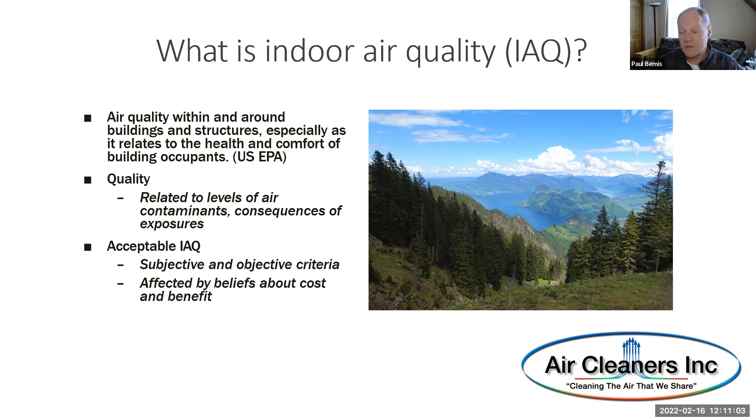So what are contaminants and sources? Well, there are a number of them. There's things like CO2 and refrigerants that displace oxygen, there's toxic gases. What we're going to be talking about today, however, is really in this category: it's allergens and pathogens.

It's the really small stuff that bothers us in terms of our human health. COVID is, of course, a pathogen. It's not the only one, but there are many in this category. Allergens that bother us are also triggers for asthma. So it's really these and this group that we're going to be talking about today.

Sources of these, outdoors, include general air pollution, the California fires for example, or pollution in the streets. You noticed yesterday in the news that the Biden administration is going to increase the requirements, the standards, giving back California control over particulate in the air from diesel engines. Automobiles in general are a great polluter, producing very small particles.

Indoors, we have building materials, furnishings, mold spores, which are very small. We have combustion from cooking, from cleaning, from heating, and we have occupants. The occupants are producing particulate as well, and we'll get into that a little bit more in terms of pathogen transmission.

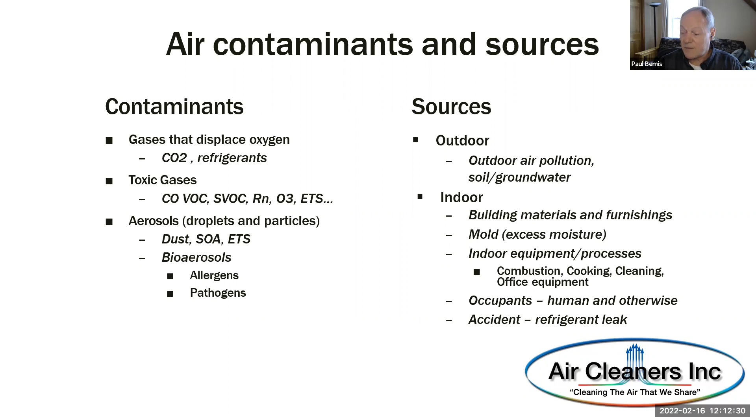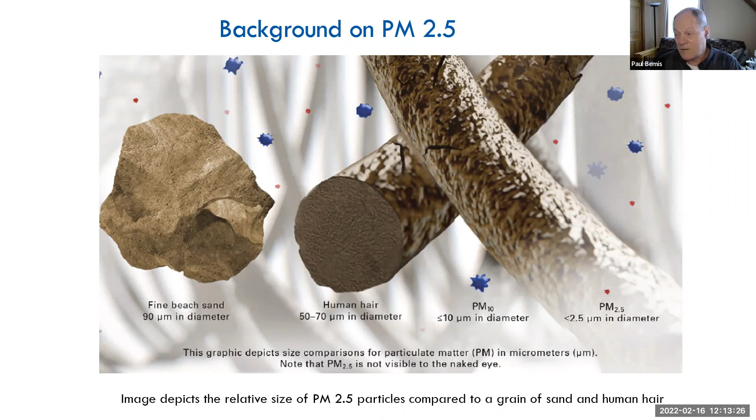So the ones we're worried about are up here, these little red ones. In fact, it's about the size of my cursor. This gives you a relative comparison of the size of the particle we're most concerned about compared to a human hair. And the ones that are really small are the most dangerous because they go deepest into our lungs and affect our physiology most dramatically. They're a straight shot to the bloodstream, and that is not a good thing for us as humans.

Now, the WHO has been focused on this, and PM 2.5 came from outdoor air pollution particulate measurement, but is being used as well for all particulate. It's the little stuff you're worried about, and they've just reduced this number to a smaller one. We're down now at 15 micrograms per cubic meter. This is a density, the acceptable level of small particulate in the environment that's going to be the new standard. So they're tightening these things up.

They go up, PM10 is a little bigger, that's a 10 micron particle. We do better with those because first of all, they fall to the ground a little more effectively due to gravity. Second, our systems catch them easier, most notably our trachea and the fibers inside of our throat, and also our lungs, catch them a little easier than the 2.5. The 2.5 particles are the ones that cause us the most trouble, and they are also, by the way, the ones that are transmitting COVID.

The effects of indoor exposure are pretty obvious. For us, the ones we're concerned about today are allergy, asthma, infection, transmission of a pathogen such as COVID or the common cold. And there's also a comfort component here as well. Perceived air quality is something that people can experience being in an indoor environment. We've all heard about sick building syndrome symptoms, which are an indoor air quality issue.

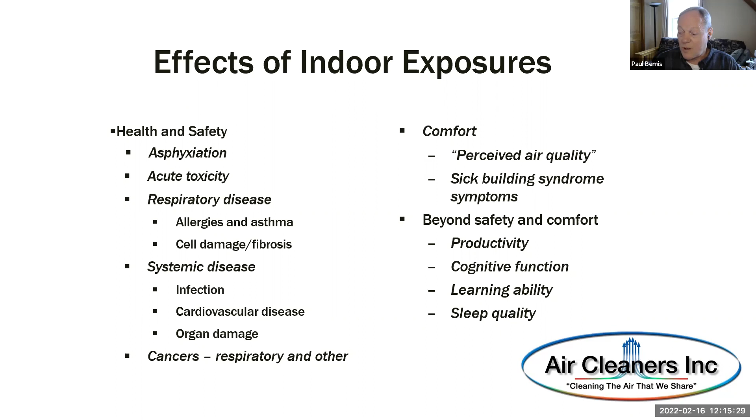Now, what's happened, of course, is COVID has focused our attention on this like never before, because the dominant transmission medium for COVID-19 is airborne, and it is very small particles, 2.5 and below, and they float in the air on thermal currents. But it has been a vehicle, a lever, to raise more general questions about what is acceptable in terms of indoor air quality.

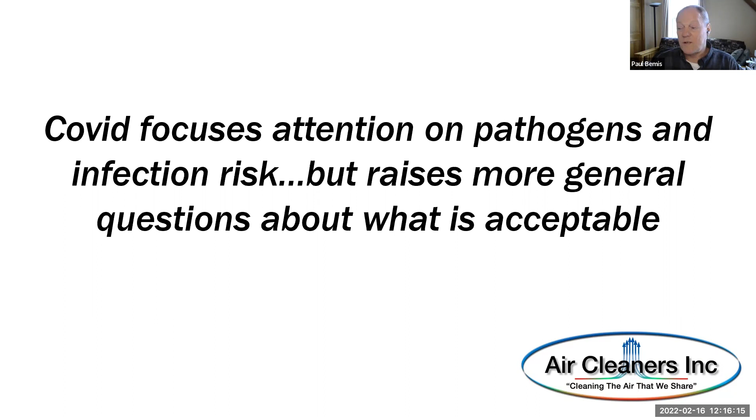So it's good for us all, whether those of you in the audience are suffering from things like asthma triggers or serious allergies. This has been good for you in general because it's raised the awareness of the need for better indoor air quality. And quite frankly, it's been ignored. We've known it for quite some time, but it has been ignored.

Now, there is an organization that I am affiliated with, ASHRAE. ASHRAE is a standards body, an organization with about 30,000 members worldwide, who focuses on what we call the built environment: buildings, homes, anything humans live in. The acronym stands for the American Society of Heating, Refrigeration, Air Conditioning Engineers. It's an old acronym, been around since the early 1900s when we first invented refrigeration. And they've continued to work on acceptable indoor air quality.

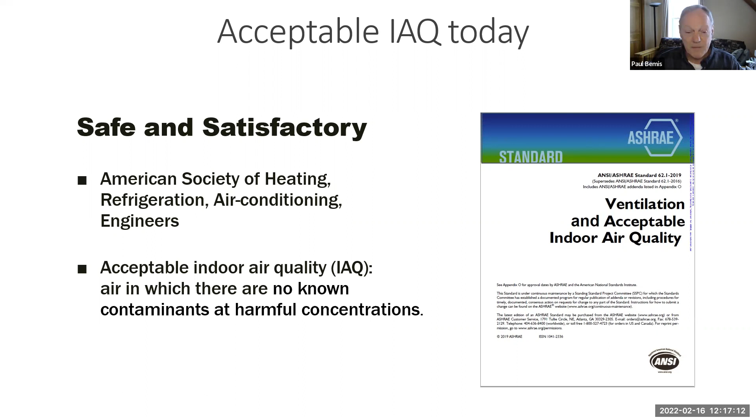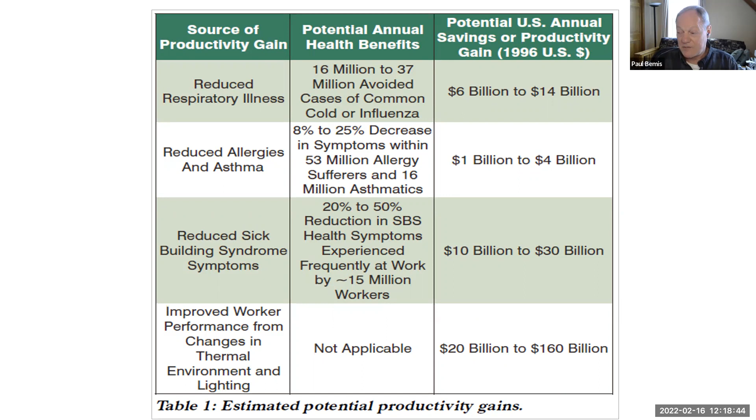Those are the cost savings, but the productivity gains are getting a lot of attention right now, because if you're an organization that relies on productivity improvements, the opportunity to do much better with clean indoor air outweighs many factors in building cost, including the cost of energy to drive it itself. So it's a big one.

No question about it. We just reviewed a study by Lawrence Berkeley Labs focused on California schools. They measured a bunch of California elementary schools and found a direct correlation between good outdoor air and productivity improvements. They tested it, and they're not the only ones—Harvard has done these studies as well.

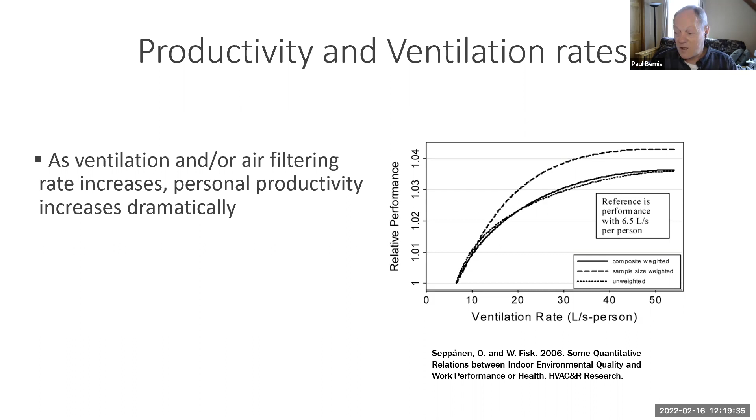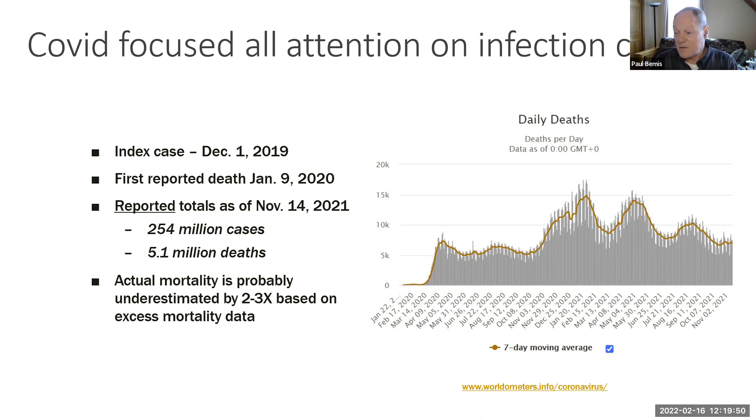It's well established. Now, the attention most recently, of course due to COVID, has been focused on infection control. That's in the same area—it's still indoor air, and we are looking at infection. It has taken a while for people to understand how COVID-19 was transmitted.

Some of the things we've learned from the pandemic is that airborne transmission of these infections occurs. That was debated early on by both the WHO and CDC, but it occurs and it is dominant. The dominant transmission for COVID-19, as well as probably all the others, including the common flu and common cold, is airborne.

This dispels some long-held ideas about how these diseases or viruses are transmitted. You remember early on, it was all about touch—clean everything, wipe it down, don't touch. What about our groceries coming home? There was all kinds of sensitivity around touch, direct or indirect—touching someone or something directly or indirectly.

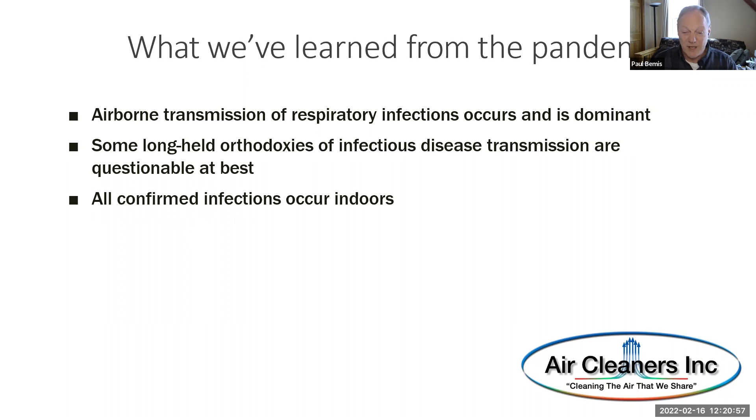But all confirmed cases have occurred indoors. There have been no outdoor cases at all, which argues that it's not just touch, because we're touching outside as well. And HVAC systems play an important role in this indoor airborne risk mitigation factor.

But I want to point out, having been in the business for over 20 years, HVAC systems in general—which stands for heating, ventilation, air conditioning, mostly related to forced air systems which many of us have in our homes and buildings—were not designed for pathogen mitigation.

They were designed for thermal control. That's really it. We've been controlling the thermal environment so it's the right temperature, and along with that, the right humidity. We do that well. What we don't do well is mitigate the transmission of pathogens, because it's never been a criteria. The whole HVAC industry was never positioned to be focused on pathogen mitigation until COVID-19 came along.

Now, it can play an important role, as this slide points out, but in many cases it's simply not set up to do it well. Existing buildings, therefore, don't provide a lot of protection, particularly if you don't own them.

If you're renting or leasing a space in a building, you don't have control over the HVAC system. You don't know what's going on, it is what it is. So they don't generally provide a lot of protection, and they've historically not been focused on this. The knowledge about the importance of this came late in the sequence—the CDC and WHO didn't really recognize it until we got well into 2022, late 2021, early 2022. They stood up and said, yes, it is airborne.

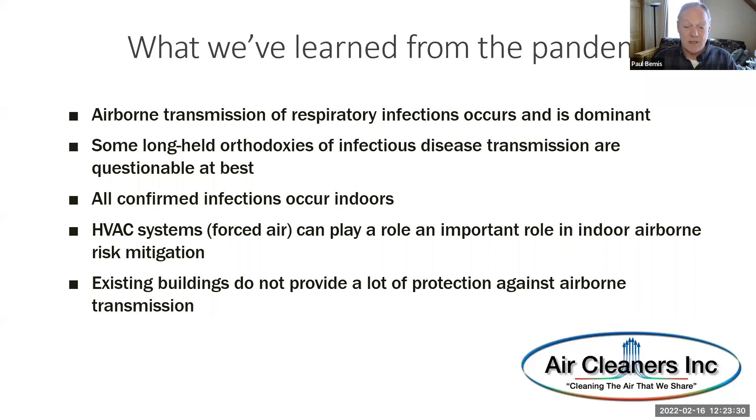Exactly, that is exactly correct, Chris, because they hang around the same size. What we're talking about is an airborne particle, a small particle. That particle can carry COVID-19, the common cold, the common flu, it can carry many things. But it's also, just by itself, a dominant trigger for asthma and allergies. So by reducing the particle count, by getting the PM 2.5 count down in an indoor environment, we satisfy multiple criteria: we reduce the potential for transmission, and we reduce the triggers for allergies and asthma at the same time. So the answer is yes.

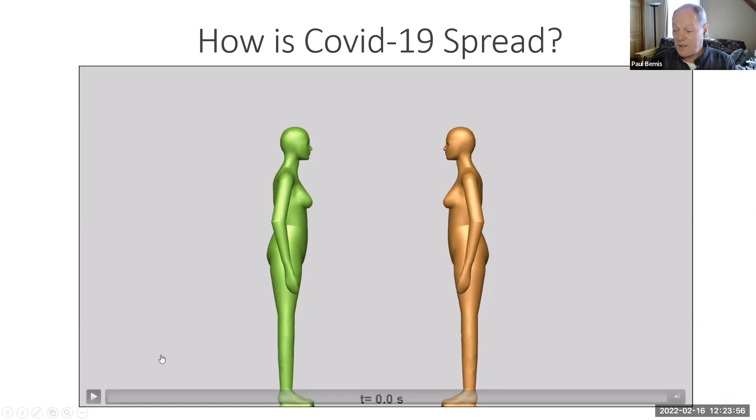Now I'm going to be showing you a lot of what we call CFD animations, CFD models. We're modelers here, we do a lot of CFD, and it stands for computational fluid dynamics. We're going to model airflow here, and we're able to do this using computer simulation. It has been validated in the aerospace and automotive industry for well over 30 years, and I am an expert in CFD modeling.

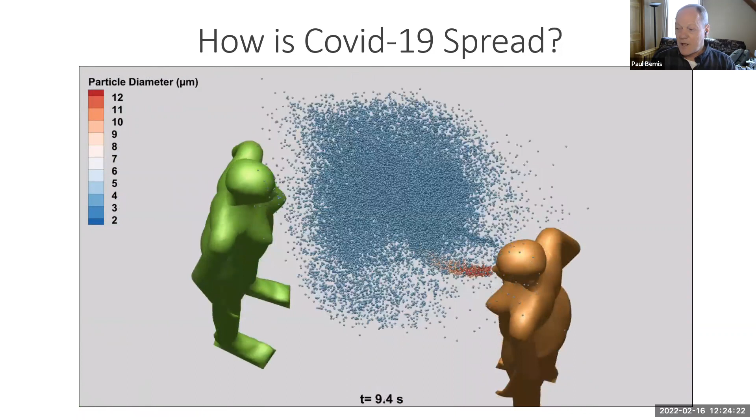So here we're going to show you a model of particles coming out of someone's mouth. This has been validated in the laboratory, that this is what occurs. What the CFD software allows you to do is visualize it. So we're visualizing someone talking while they're standing there speaking, and you can see that cloud of particles coming out of their mouth. You'll also notice they start floating up. This is quite typical—our bodies operate at around 98.6 Fahrenheit, and when we speak, particles come out of our mouth and float up, and they will eventually fill the room.

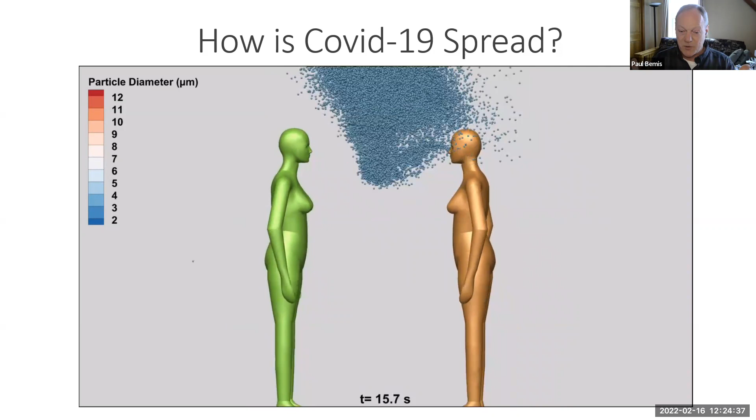You can think of it as a smoker. If any of you are old enough to remember the old smoking days, people would light up a cigarette inside a building or a room, and the smoke would rise and finally accumulate in the ceiling and work its way down until the entire room was gray. Same effect here, except it's a deadly pathogen instead of just a cigarette.

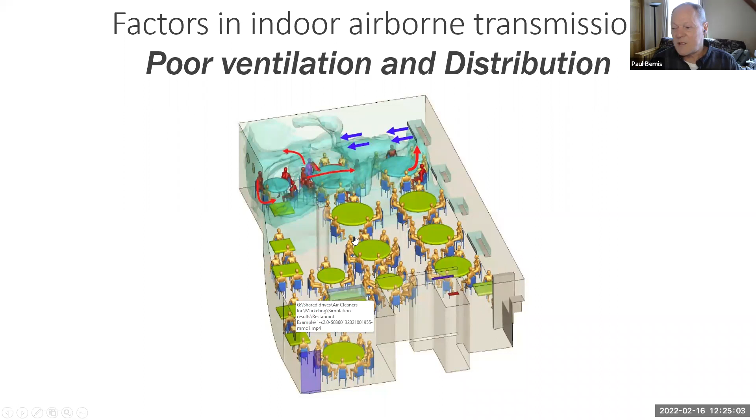Now, what happens in a room—I'm going to show you some more animation here. This is actually a case that was well documented. This is one of the first super spreader events that occurred, and it occurred in Guangzhou, China. I'm going to show you the animation sequence from here. I am going to stop it and show you what's going on first.

So here we have, sitting over on the left-hand side of this restaurant, the emitter—we call this the index case. This is the person who has COVID-19 and they're breathing. And again, you see that going up into the top of the room and bouncing and beginning to be mixed. Red is bad—red is the highest concentration of the pathogen coming out of their mouth. Over here on the right-hand side, we have the air conditioning units. These are recirculatory in nature, they don't do much filtering.

This is very, very common that you have what we call a fan coil—it's just a cooling coil with a fan blowing air by it, and it circulates, very much like an air conditioner you have in your home or in many buildings where they don't bring in outside air, they're just conditioning it. Remember, I told you earlier it was a thermal issue, so if you can get the temperature right, everybody should be happy. Not quite so much, because this pathogen and this airflow from this device tends to spread it. Now, these people in red here did get COVID-19—there was a number of them here who contracted the disease after being at this restaurant.

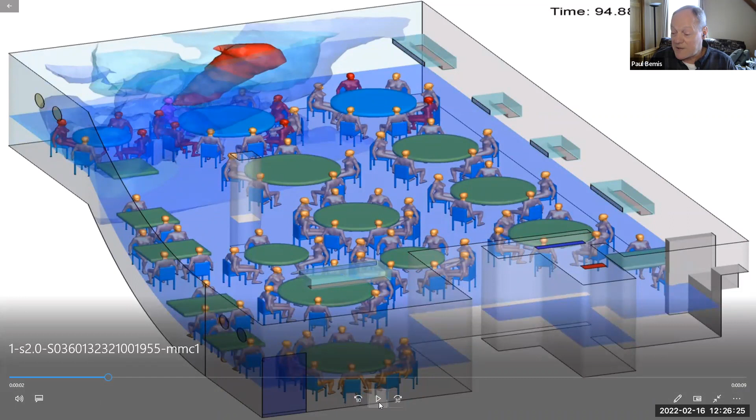Where people over here did not get sick, and if you watch this sequence, you can see why. The people who did this work went into the restaurant and modeled it and came up with this output.

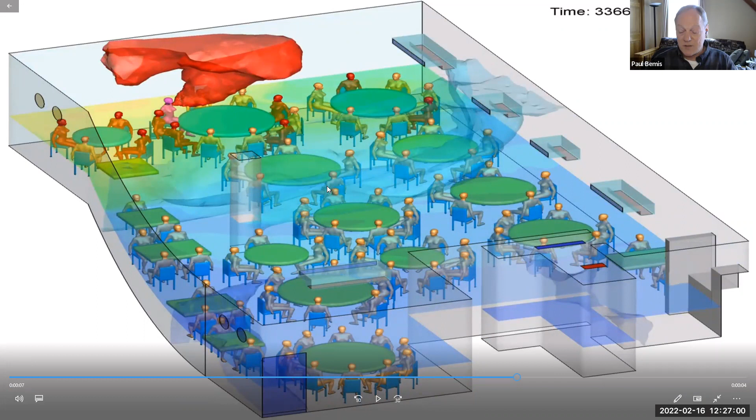You notice over here, remember, red's bad. So it's getting mixed into this environment and creating an entire area on this side where the pathogen has a high enough concentration, because it's a density issue, to make these people ill. These are the ones who caught it. It was the first time we had the opportunity to actually go in and scientifically measure and document what was going on, and then correlate the simulation to the people who became infected. So, very important piece of work done there.

And you can use, of course, CFD to visualize it. CFD gives you the opportunity to see it. And that's why it's significant.

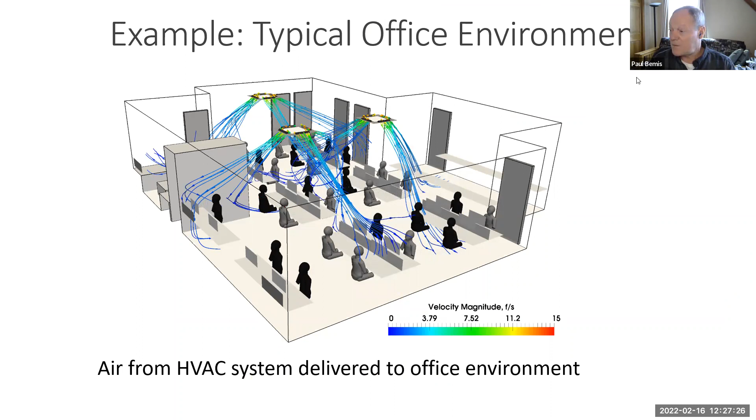Now we have another one here. This is a typical office environment, and I'm going to show you this in what we call a 3D visualization. It's a static image, but I get to manipulate it and rotate it. What you'll see here is, again, these are cooling units at the top. You see them up in the ceiling.

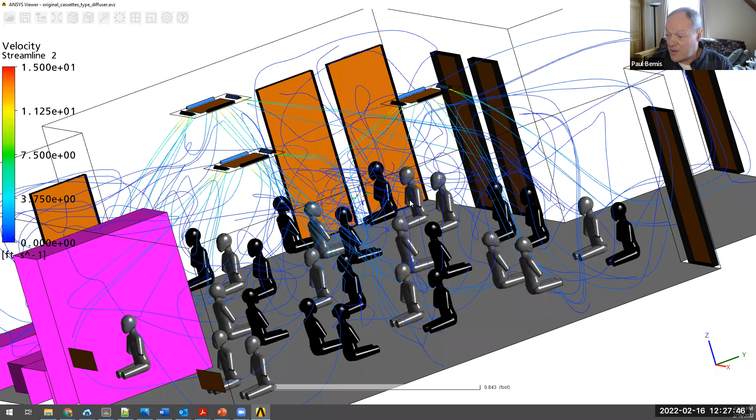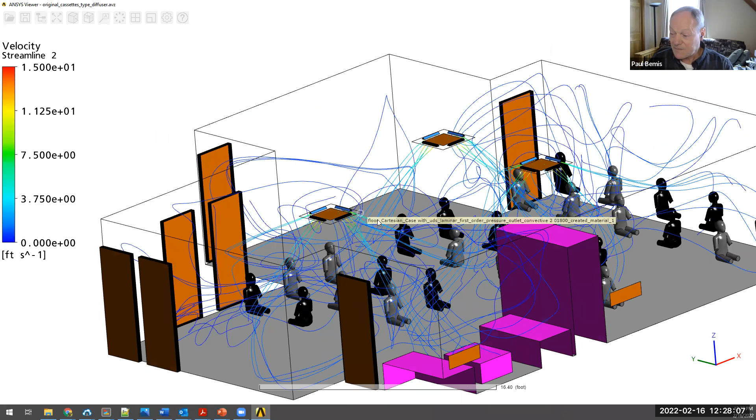Many of you in your environments, particularly work environments, will look up and see these devices in the ceiling that are returning and supplying air. But you notice it's not uniform. The air is moved around the room by the location of the vent and its flow rate, the speed at which the air is coming out, and there's not a lot of uniformity there. These typically get placed just anywhere. There's not a lot of rhyme or reason to placement of these devices historically. They're just put in the ceiling, often based on lowest cost. The HVAC person will put them in wherever it's the lowest cost.

What this causes is a non-uniformity of air in the room, both thermal, but more importantly, particulate. What you'll see in a room like this is a very uneven sequence. Here's a still of it here. You can see those air jets coming out, and it causes it to be uneven.

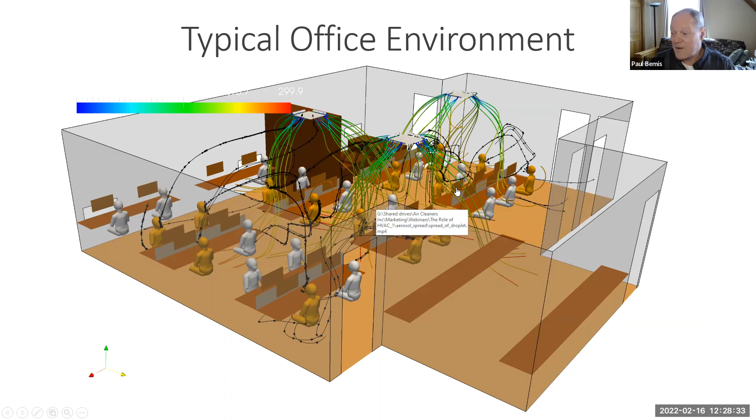The result is, if we looked at the air distribution in the room as a function of color, which I'm doing here, if it's red, it means there is very high concentration of particulate, and if it's blue, it means there is low concentration. You should see a uniform color here. If the room was evenly distributed with air, everything in there would be the same color.

But you see there's these pockets. Now, these pockets are the same ones that we all have in our homes where all the dust collects. Most of us know in our homes or wherever we live where the dust accumulates - this is the place it accumulates. It's called a low pressure area. It's where all the particulate loads up.

Now, that's a bad thing if there's COVID in the atmosphere, because if you're over in this area and you're breathing, that means the density, concentration of the pathogen will be highest in that region. And as we move up in the room, you see I'm walking up, just slicing the room in a vertical direction. As you see, you move up, it gets worse, because, of course, the pathogens all float near the ceiling.

So one of the problems in buildings, just to summarize here, is that the air is not distributed evenly throughout the room. It just happens to be the nature of the way they're designed. This will be rethought - I think COVID's going to make us all rethink how it's done, but this is how it is today.

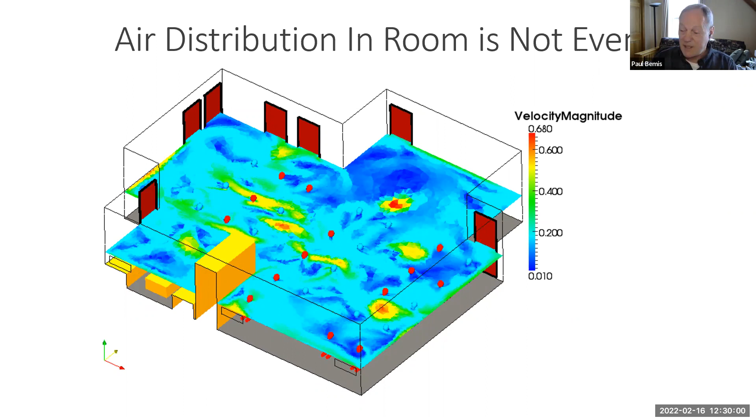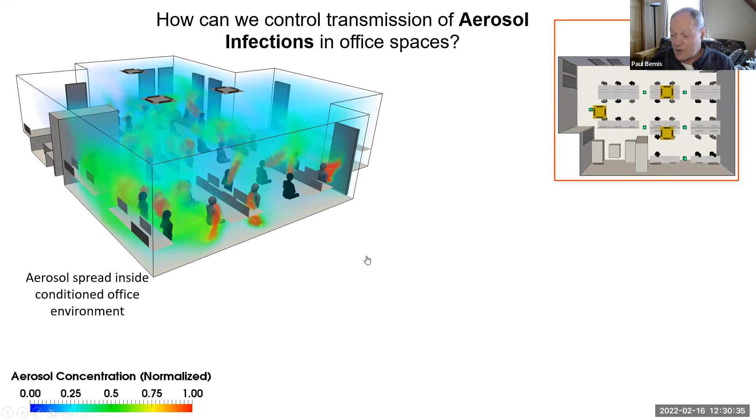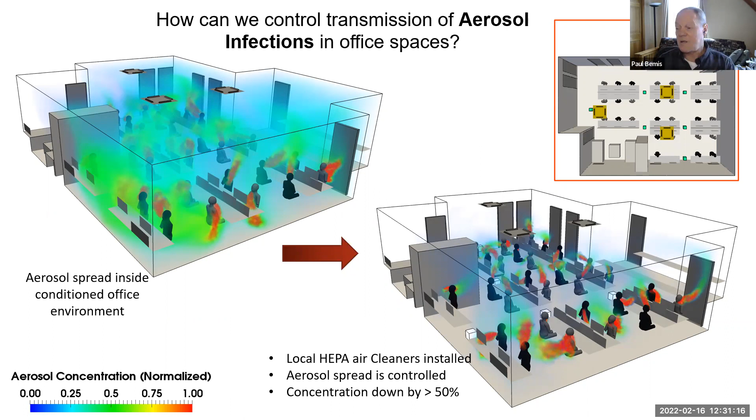Early on, we began to look at the effect of putting air cleaners in, particularly HEPA air cleaners. We knew this was going to occur because we're experts in HVAC and interior cooling and heating. We knew this would occur; we were wondering how to fix it. So early on, by putting some air cleaners in - you see them sitting on the floor here - we put 6 into this room and we were able to drop the average concentration by over 50% by putting those air cleaners in, even with all of these people sick. So we began to think, okay, air cleaners look like they're going to be both necessary and important, because in order to have control over your local environment, you need to do something, be able to bring something in. Portable HEPA-based air cleaners, we thought, made good sense.

Now, the assumption here is that the outdoor air is clean. In California, when they're having wildfires, it's not clean. If you're living next to a busy street with diesel engines going up and down—this was in the paper today about Long Beach and the particulate in LA—if you're living anywhere near those tractor trailer trucks, outdoor ventilation is not the answer. Indoor ventilation is, or indoor cleaning through HEPA filtration. So they are additive. You can have one or the other or both.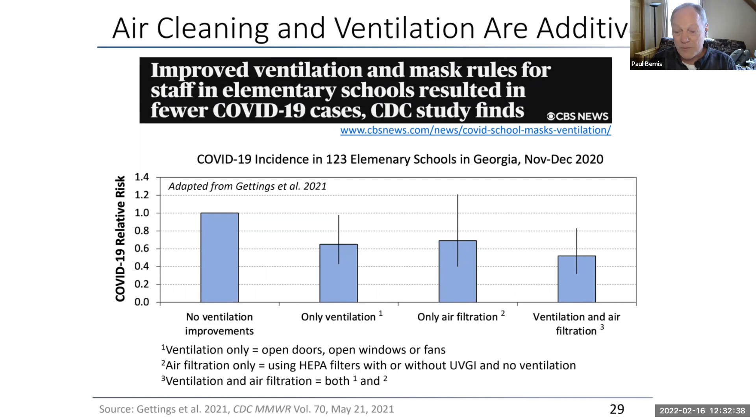Now that turns to air cleaners. I just want to mention that air cleaners are an effective way to improve the environment. We got involved with the development of air cleaners as a result of all this modeling we were doing, and they are effective, particularly if they're well made. You have to be careful because some people make claims that aren't good. What you want is a HEPA-based air filtration unit. That's important, to have that word HEPA in there, and that it should be a device that works well.

Ultraviolet radiation also works, but has to be implemented correctly. The way ultraviolet works is that it's actually a radiation, irradiating the pathogen itself and killing it. However, it needs something called dwell time—it needs to be exposed to the pathogen long enough to kill it. So if the pathogen goes by it too fast, it doesn't have an effect. Implementation of UV is specific to the environment and has to be done well. We do know how to do it well. It's been around since the days of influenza, so we know it's effective. The question just becomes how to implement it correctly.

Paul, quick question for you on that, or actually two questions. One, does the ultraviolet do anything for particulates? Does it remove particulates that are not pathogens, for example, allergens like mold or other small particulates?

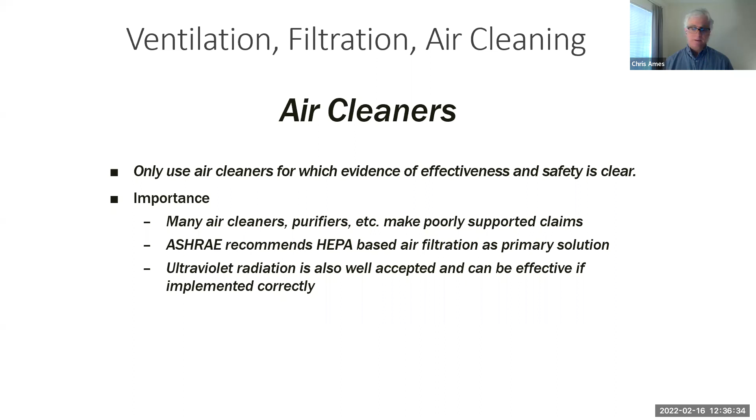So it's not just us making claims here. This is the EPA. These people don't say this easily or lightly. It's only after a tremendous amount of study that they would say something like this. So it is effective, it does work. We have both the EPA as well as anecdotal studies that show it.

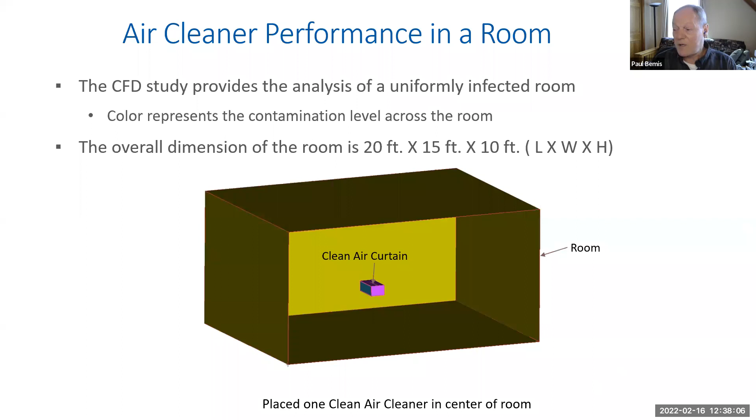So here's how one of these things might work. This is an air cleaner, a generic air cleaner. It happens to be one we built, but in general this is how they work. We put it in a room. We're modelers, so we can simulate this. We put it in a 20-foot by 15-foot room, by 10 feet tall, and see how it works.

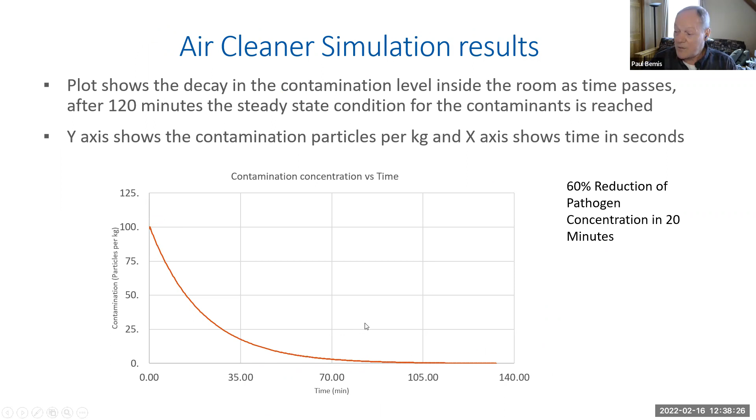What we find is that within a very short period of time, when we plotted it, you can see that the particulate drops like a rock as a function of time. Within 20 minutes, 60% of the particulate in that room is gone. 80% in 30 minutes - boom, comes down very quickly - and less than 1% towards the end of it. I do have an animation sequence of this as well.

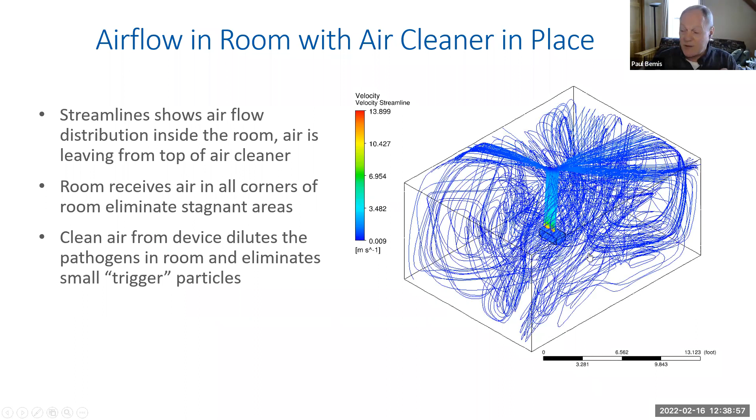I'll show you how this particular device works. It shoots air out the top and just purges the room, so it flows up and around and circulates very quickly, driving down overall concentration by mixing. You want the room to be really mixed. So back to my earlier slide where you saw the multicolors - you won't see that here, because it's going to uniformly drive everything down.

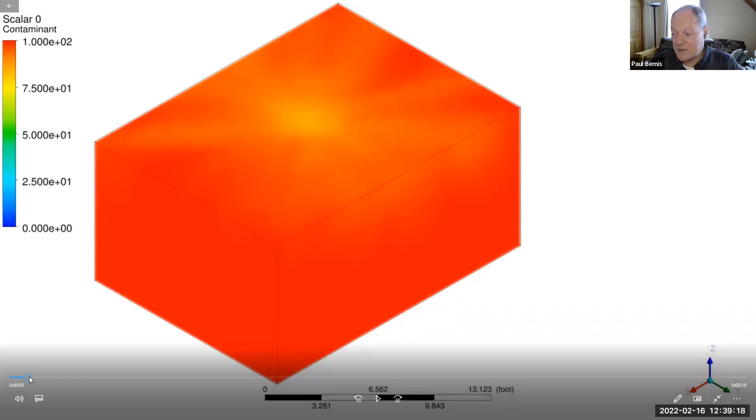Let me just set this animation up before I run it. What we're doing here is starting with the room in a state that is fully filled with a pathogen, or in this case a particulate - a 2.5 particulate, it's just not good. We have an even concentration of it throughout the entire room. As we run the simulation, you'll watch that go from red to blue very quickly.

This simulation runs for about an hour - that's an hour's elapsed time. And you see the room just dropping to be absolutely clean. This is how they work. They're quite effective.

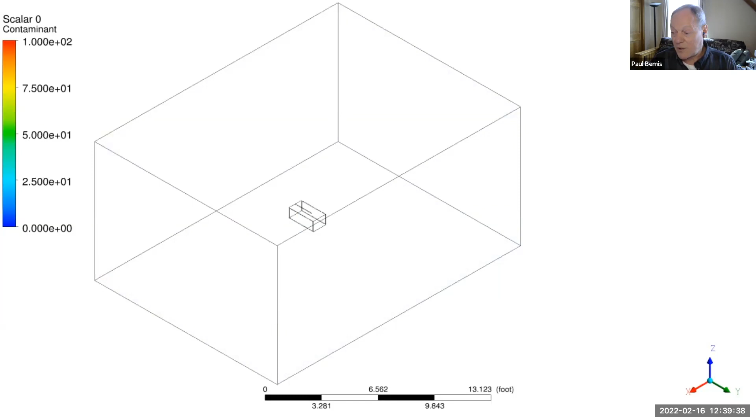It reduces the impact of seasonal effects like allergies, endemic diseases, and it will improve overall health, improve the economic output, and it is synergistic with other moves that we're making in the wellness space.

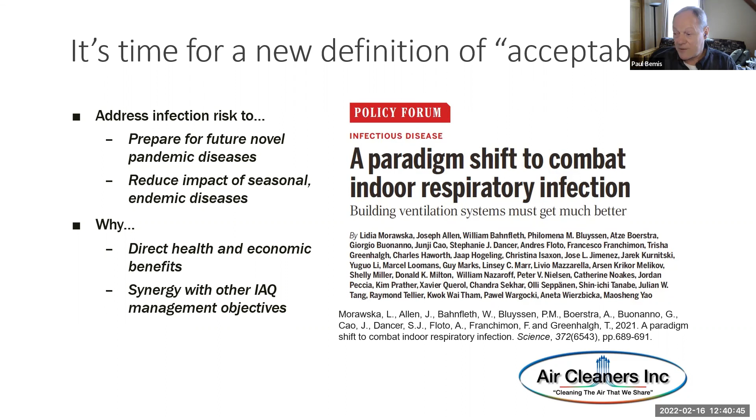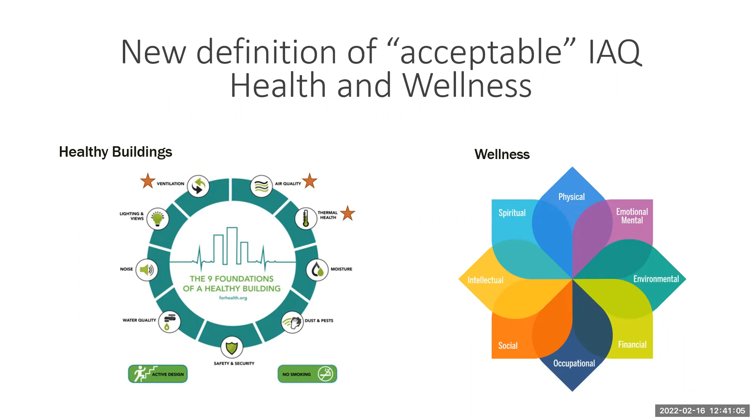So oftentimes, this slide comes from, I believe, Harvard's Chan School of Public Health. They've done a lot of research. They're the ones who also did the research showing the improvements in productivity.

There's a great book called Healthy Buildings that I'd encourage you to take a look at. They're saying this is not just one component. We're talking about ventilation, air quality, thermal health, moisture control. Humidity is important—humans like between 40 and 60% relative humidity.

If you get below 40%, we get grumpy. If you get above 60%, we get grumpy, and health declines in both cases. When it's too dry, pathogens float and don't come down at all. When it's too wet, you get mold. So we like it between 40 and 60. There's also dust, pests, safety, security—a full complement of things necessary, the 9 foundations of a healthy building.

At the same time, the whole wellness movement is looking at us as humans and saying there's a physical component, emotional component, environmental—we're more productive if we work in an environment that's interesting, has some outdoor elements, a nice environment, and we're socially and intellectually comfortable. These things are beginning to work together. I like it—it's a movement in the right direction.

It is a positive outcome of the effect of COVID-19. COVID-19 has been a horrible thing—we've lost close to 1 million people to it. But the result has been an awakening of the need to improve indoor air quality to the level necessary to make us healthy and productive as humans.

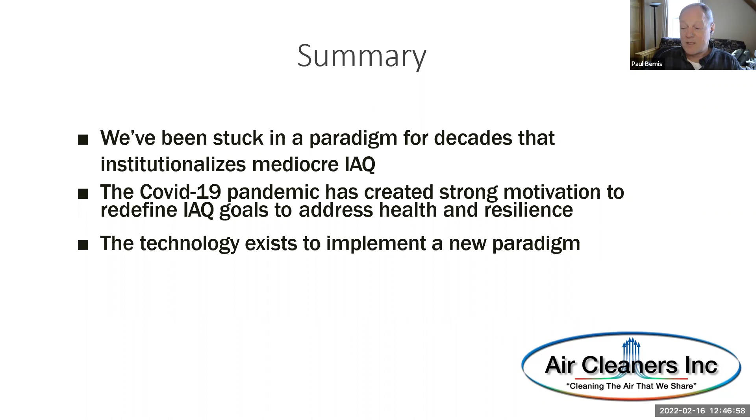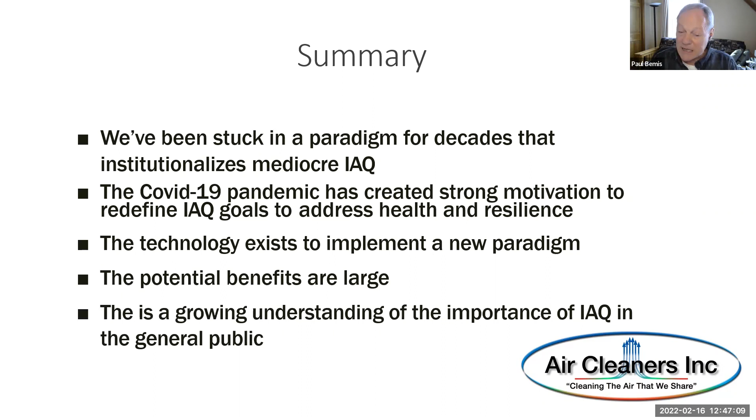Technology is well understood. It's been there a long time. HEPA filtration has been around for a very long time, and we know it works. The potential benefits are great, and there's a growing understanding of the importance of indoor air quality in the general public, and I think that is a very, very healthy thing.

Now, before you go, I want to give you something to take with you, something you can work into your own life. There are 4 things I want you to be aware of as you enter a building. Be sensitive to these 4 when entering any indoor space.

People. How many people are in the room? How many folks are there? Because remember, any one of them can be emitting a pathogen. And the more people there are, the higher the probability that something like that has been going on.

How close are they together? Because when you are closer to someone, the higher the concentration you'll ingest of their outgoing air. So if they have a pathogen, the concentration is very high near them as they're talking, and if you're too close, you're going to breathe it in.

So how much space? People, space, time—how long are you there? Duration makes a difference. If you're there for a short period of time and you ingest something, the probability that you'll contract some kind of disease or cold from it is lower than if you're there for a longer period of time. So time is important. How long are you there?

And place. Place is important. Look up—how tall is the ceiling? Remember, air comes out of our mouth and floats up, bounces off the ceiling, and comes back down. It also lasts a long time. The half-life of the COVID-19 pathogen is 1.1 hours, so it'll last a long time. It's going to be there. So if people have been there breathing for a long period of time, the room's going to be gray, if you could see it—or in our case, red, maybe orange.